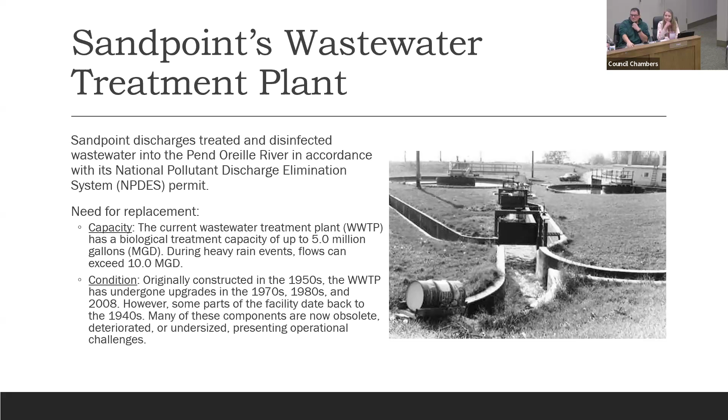So understanding our need and where we want to get to, we do have a few goals. There are several goals outlined. I'll highlight the first four that were prioritized by Mayor Grimm.

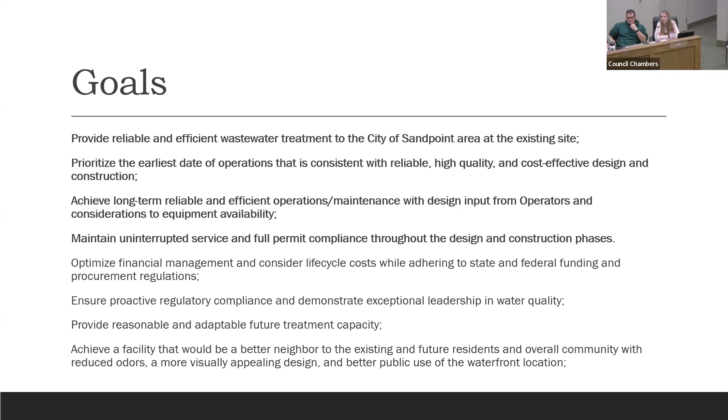Our goals are to provide reliable, efficient wastewater treatment to the city of Sandpoint and area at the existing site. Prioritize the earliest date of operations consistent with reliable, high quality, cost-effective design and construction. Achieve long-term, reliable, efficient operations and maintenance with design input from operators considering equipment availability, and maintain uninterrupted service and full permit compliance through the design and construction phases.

So understanding our need for improvements, replacing the plant, and our goals, this is the general process that we follow. It starts with a facility plan. Sandpoint adopted its facility plan in 2019. We're on the next step, which is our preliminary engineering report.

These are two reports that the Idaho Department of Environmental Quality, IDEQ, reviews and approves. That's the effort we're working on today, and this is all per IDAPA requirements. Our next step will be to develop construction documents, turn those into a permitting effort, and then go out to bid or construction, depending on our contracting method: design-bid-build or CMGC. That's how we turn this facility plan into a project, and that facility plan is really our guiding document for how we're moving through this process.

Below, you'll notice funding efforts. That is a parallel effort to the actual design and construction project, and it's ongoing. It's an effort that started in 2022 when Sandpoint updated their wastewater sewer rates, and it's an effort that will continue through the entire process.

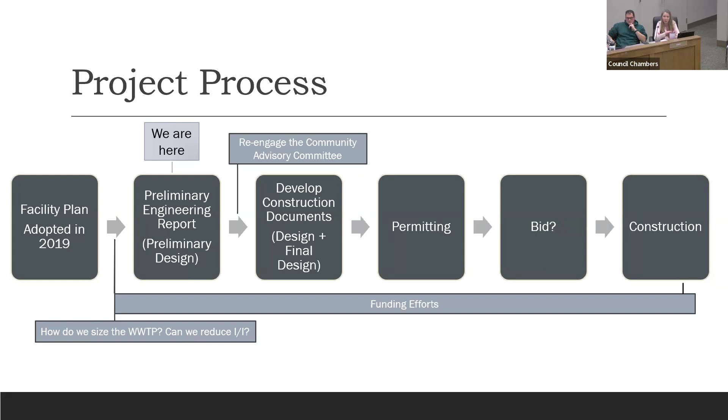So the scope of work that Keller is working on, and we have an update from them today, is the preliminary engineering report. You can think of this as the preliminary design, all in accordance with IDAPA standards. They'll provide preliminary cost estimates, select treatment types, and recommend contracting and construction phasing for how to actually implement the project. They'll also support funding efforts.

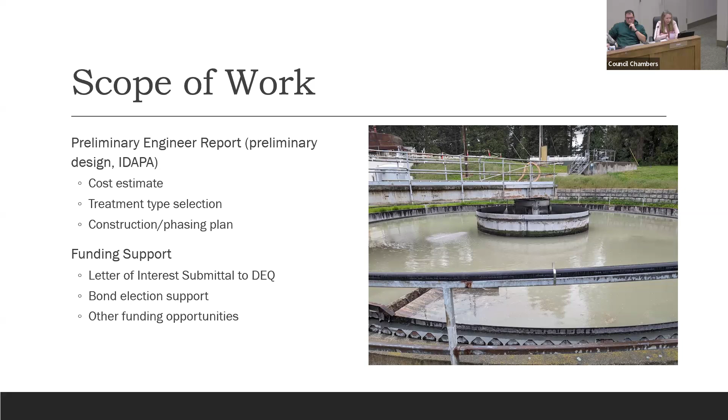We'll be submitting a letter of interest to IDEQ. They'll support us through bond elections and other funding opportunities. So with that, I will hand it over to Keller to provide an update.

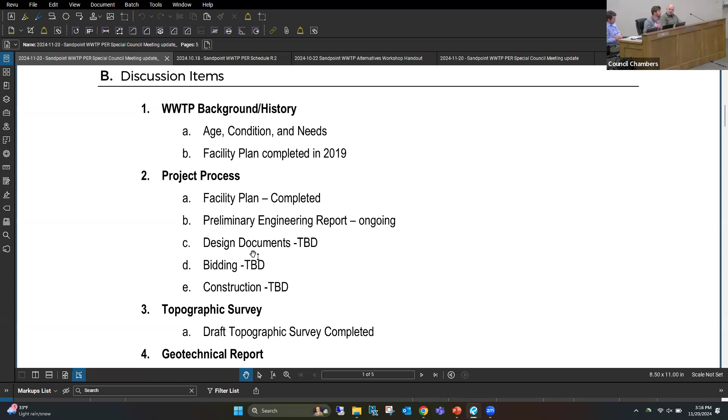On top of that, we've also completed a draft geotechnical investigation. We've gone out on site and done boreholes to understand the soil conditions.

This is really important because we all know Sandpoint struggles with soils and water, and high groundwater level. It's really important to capture that early on in this design phase to make sure that we're reflecting the cost to deal with that material on site and the construction challenges associated with that.

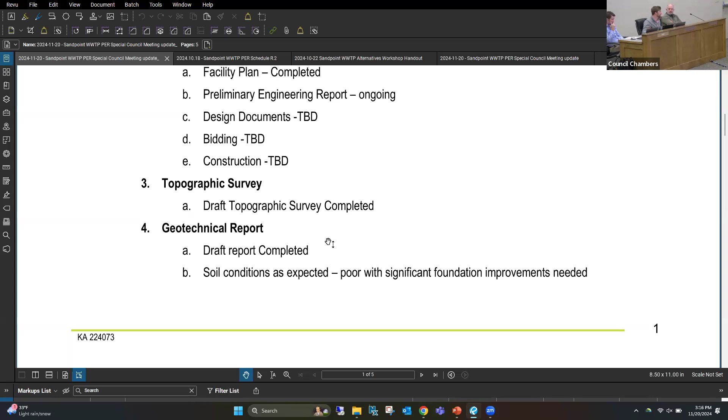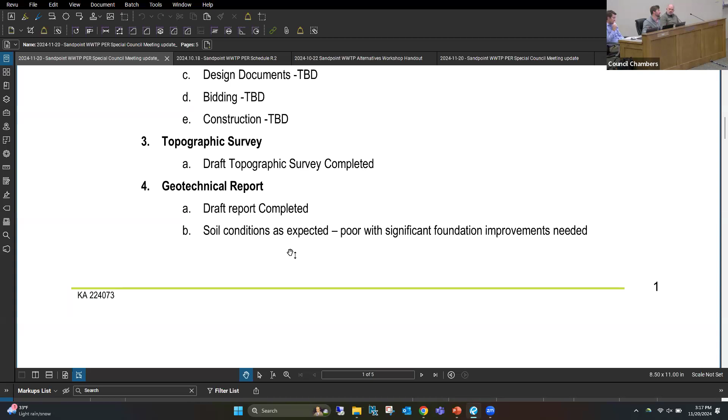So, as we expected, soil conditions were poor. There's going to need to be substantial structural design and foundation design to make sure that we don't have settlement issues. One of the things noted in our condition assessment is it's very evident in a lot of the facilities that there is settlement, whether it's buildings, concrete slabs, and whatnot throughout the site. That's a very common theme, and that has a lot to do with, one, the age of the facility, and two, the high groundwater level, and the overall soil condition.

So one of the things we helped go through and evaluate was, just to back up a little bit, a facility plan that was completed, that's at like a 50,000 foot level. You go through and take a high level view of where these projects and improvements are going to develop and how they're going to shape in. And then we take that and further refine it into a more detailed design that can be used to jump into your final design and development of the plans and whatnot.

So with that, one of the things we looked at is, how has the condition of these facilities changed since the facility plan? And at the same time, what do our electrical, structural, and process engineers see? I think Dallin can chime in a little bit on that.

But I think generally speaking, Holly and Devin have nailed it. You have a facility where many of the buildings and structures are beyond 60 years. There is some hope because some of the concrete in these structures is in generally decent shape given the age. But I think the big thing is that your facilities are approaching that expected useful life, and there needs to be a plan in place to make sure those are appropriately accounted for replacement.

Yeah, the only thing I'd add to that is that condition assessment is only as good as what you can see and walk around on the site. So the conditions of the interiors of basins that were not drained, we were not able to identify. The conditions of buried piping or other types of things like that are somewhat unknown.

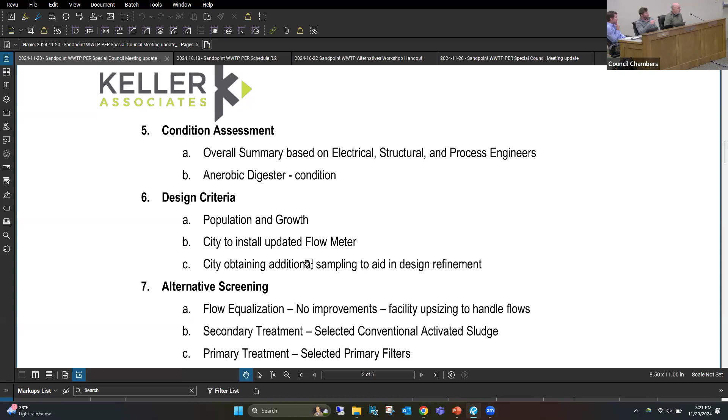So one of the first big lifts we had is we understood the existing conditions. We understood the site conditions. We understood how facilities were functioning. We refined, okay, what are we planning for? What's the population? What's the flows? And once we defined all that, then we went back and evaluated what are some other alternatives that should be looked at or considered that maybe weren't done in the facility plan that could provide value to the city.

And one of them, we have 4 items there, and one of the big ones was flow equalization. As we're all aware, we have a high I&I flow that comes in due to our snow and rain events, and that water makes its way into the sewer system, and then it overwhelms the treatment plant, and it becomes very difficult when you don't have a facility that can properly handle that and treat it.

So one of the alternatives we looked at is doing an equalization basin that could route, when you have those couple times a year peak flow events, into an equalization basin to alleviate your downstream treatment processes. We've done this in other communities throughout the state, like the city of Preston, and it was super beneficial from the aspect of not over-designing your downstream treatment facilities and enabling that peak flow to be reduced. Am I making sense?

Okay, so then we looked at, okay, if we didn't do that option, we were just going to upsize the facilities and disregard that. Unfortunately, we were all hoping that the flow equalization would pencil out, but by the time you actually size the equalization basin for how much of an I&I swing you have, it is a substantial facility, and it did not pencil out to actually build this facility for these couple days out of the year that we're looking at. So that was a scenario where we weighed those odds and evaluated each one of these alternatives based on a criteria.

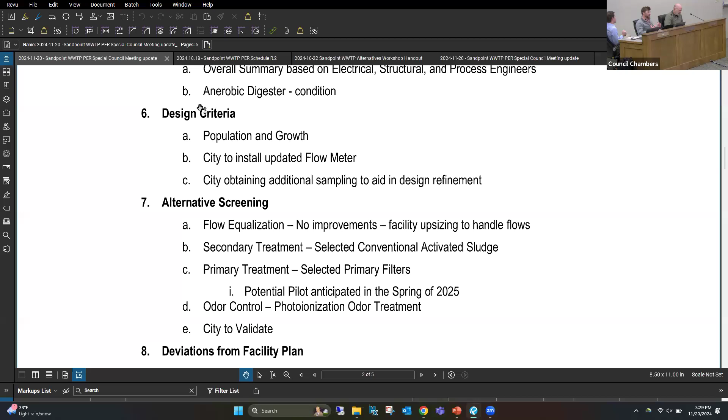What was ultimately selected was photoionization, which gives a lot of flexibility for odor treatment and removal. It requires less maintenance, and it's just a good staple for removing odors.

There wasn't a ton of discussion about this in the facility plan, so I think it was a good topic to dive into early on.

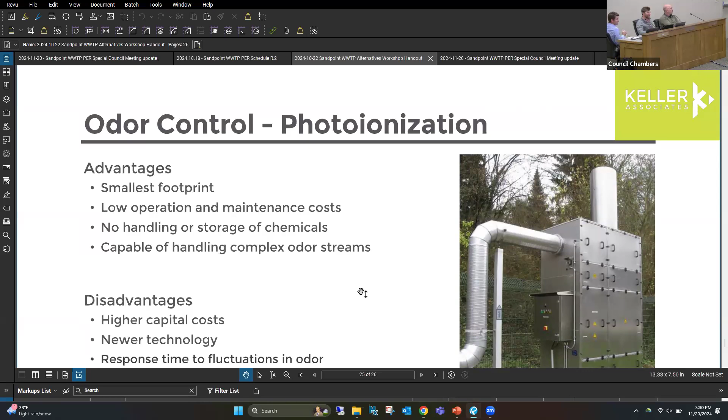Just jumping through the slides here—it has a fairly small footprint. The operations and maintenance component was a big consideration, since we don't want to add more work to Devin's workload already. There's less management and maintenance involved with it.

It does have a slightly higher cost than some of the other odor technologies, but I think that makes up over the long term from not having to maintain and operate it as much. One important thing to note is we're doing some odor testing with this project to fully understand the odors being experienced, whether it's H2S or otherwise, making sure whatever is designed handles those odors properly.

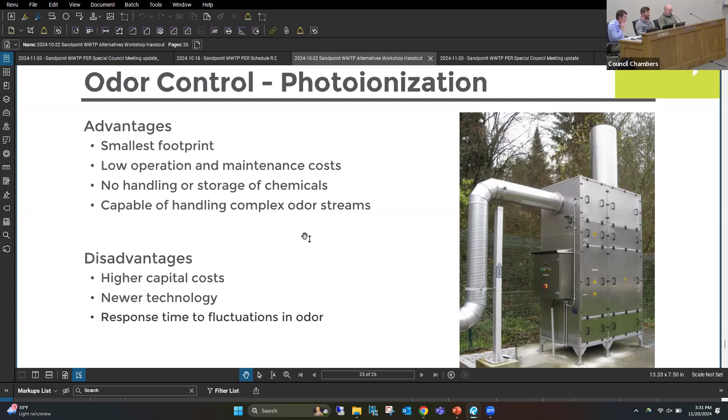We've all driven by some of the treatment plants around here that have odor control, but you wonder if they actually have odor control. So that'll be a really important component in this regard.

Then there are deviations from the facility plan, which Holly alluded to. The intent here is that the city selected improvements from the facility plan, and now a consultant came in and said, let's look at this from a blank slate—what do we like, what makes the most sense, how does this correspond to the city's goals, are we achieving that or not. There are probably too many items in the agenda to go through today.

But it gives you a summary of every kind of process element in the treatment plant. We're not going to go through every one of these, but it notes what was planned for in the facility plan. And then the far right column is Keller's take on our evaluation of these improvements and what's needed or different from that. So do you want to jump to any of these that would be good to hit on specifically?

Yeah, I think we'll just highlight maybe three of these here if we can. A large majority of the facility plan, we still recommend following through with.

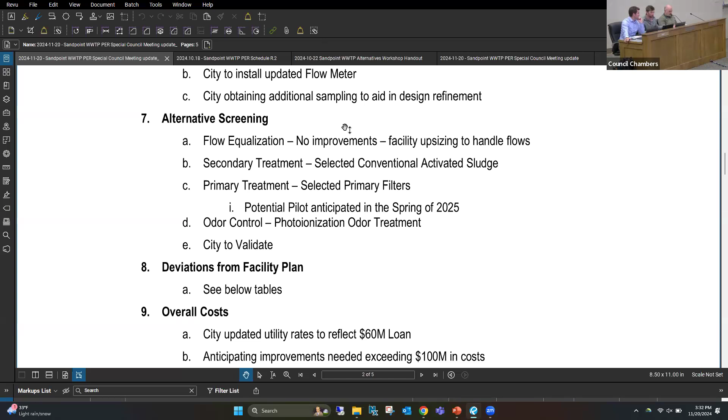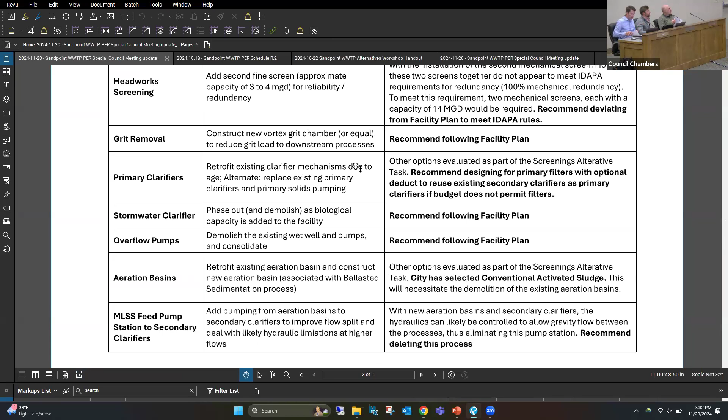As we alluded to earlier, that secondary treatment technology has a couple of components tied to it. If you look through that, aeration basins, MLSS feed pump station to secondary clarifiers, the secondary clarifiers, RAS pumping and WAS pumping, and the ballasted sedimentation system, that's all lumped into that secondary treatment process. As we talked about those alternatives and looked at the various secondary treatment processes, the city selected to go with the conventional activated sludge system, so all of those things lumped together pivot to that technology. That is a deviation from what the facility plan recommended with the ballasted sedimentation process. So we wanted to identify that as a detour from the facility plan.

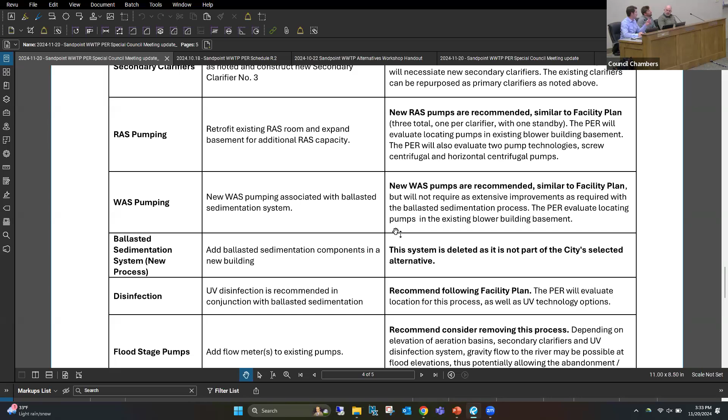The other two that we wanted to identify with the city that were not identified in the facility plan: one is the headworks facility. This is the front lines of the wastewater treatment, where rags, debris, and those types of things are removed from the process so that any downstream processes, pumps and pipes don't get clogged and create a headache for Devon.

The facility plan did not identify having sufficient capacity for the design flows expected in the planning period. Or rather, it didn't provide enough redundancy in the system so that if you lost a screen, or if a screen was offline for maintenance, there would still be sufficient capacity to treat the peak flows coming into the plant. Our recommendation is to ensure reliability in that process by providing enough screening that you have redundancy, with another unit or units that can provide capacity for all the flow. That is in line with the requirements of IDAPA to have that redundancy.

The other process we identified as needing improvements beyond what was identified in the facility plan is the digestion process. Without getting too technical, the digestion process basically takes the solids that have been separated from your liquid stream and digests those solids so that the end product is free of vectors or pathogens. It's safer to apply on land-applied crops, or in some cities it can produce a biosolid used as compost or fertilizer in your garden, though not in Sandpoint's case. Generally, the idea with digestion is you're producing a safer biosolid than would otherwise be produced.

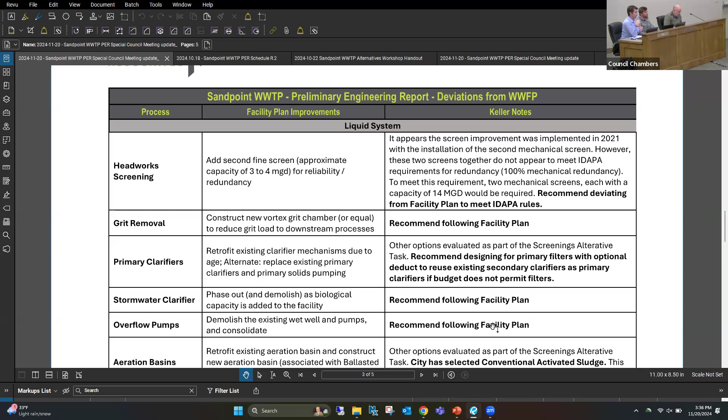To achieve that biosolid, you need a certain number of days in the digestion process. The digestion process at the plant right now is very close to capacity. As flows continue to increase with additional population, that digestion process does not have sufficient volume to contain those solids to meet the Class B biosolid level needed for the city to dispose of them the way they're disposing of them now, which is land application. The facility plan did not identify any improvements to increase that volume or capacity in order to continue meeting a Class B biosolid. Our recommendation is that sufficient capacity is provided to meet that.

Sorry, that was very technical, I apologize. I can sometimes get carried away. No, exciting—for me, it is.

Holly, do you think we captured those critical ones? Devin, was there anything else you think would be good to discuss on those deviations? I think you captured it pretty well.

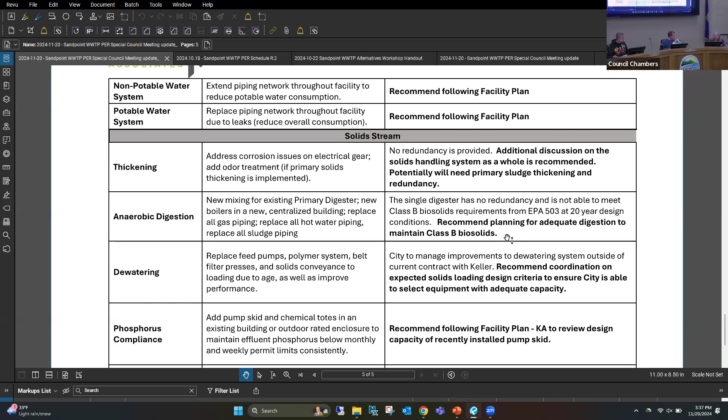Yeah, I'll just add, I was at all these meetings working with everyone on these discussions. On the primary treatment side, one of the really challenging things was that this membrane bioreactor is a really neat technology. Do you all have this version? No. Can you just flip to the layout on the bio membrane plant, the MBR plant? Yeah, I think it's page 13.

So this one was one of the four technologies we looked at as an alternative, and it's really amazing. Basically, the whole sewer plant is contained in that purple building.

When we were looking at this, obviously once we start digging into the site and building, there's a lot of pipes and unknowns from all the patchwork and other things.

So in many regards, having a compact footprint—basically a fully enclosed system on a small portion of the site—meant limited exposure to unknowns, risk, and contingencies.

But the problem with this technology is that you can't just get funding for a piece of it. This thing turns on, and it's on, and it replaces everything else. So it doesn't give us that flexibility. And this is another thing we discovered working with DEQ and rural development.

The way DEQ is going to take our letter of intent, they're going to put our needs in a list across the state. They've got a pot of money and they need to figure out who they're going to fund, and they obviously don't have enough money any given year to fund everyone. So depending on the needs from other communities, if our ask for something like this is significant, they might say...

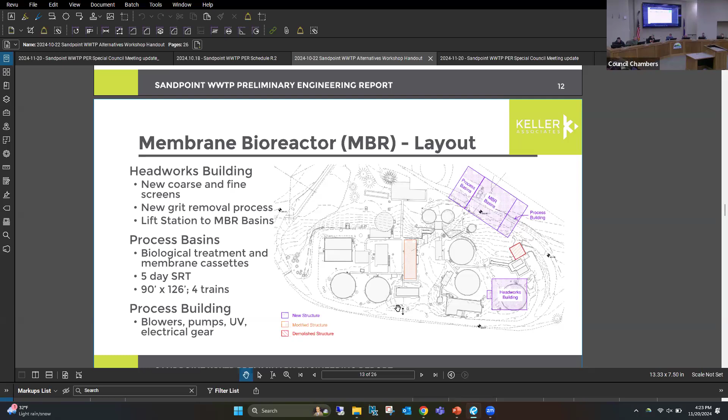Could you go to page 6 on your PowerPoint, just so that—and maybe page 7 too—so they can see.

Mr. Mayor, if I might make a comment. If I had just a minute to process what you just said, I'd rather sit through a 2-hour PowerPoint. This is a $100 million decision the council is going to have to make, so I'll just say it out loud. I've suffered up here through many hours of presentations, but this one, although the topic might not be exciting to everyone, is a super important decision we have to make. So I'd rather have too much data and sit here longer than not have enough and be questioned for the decisions I made.

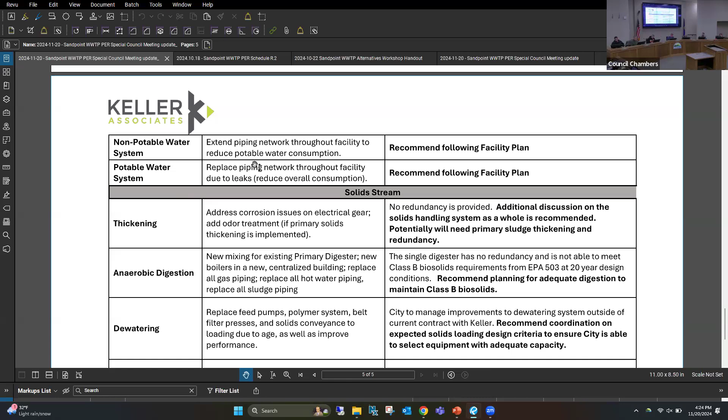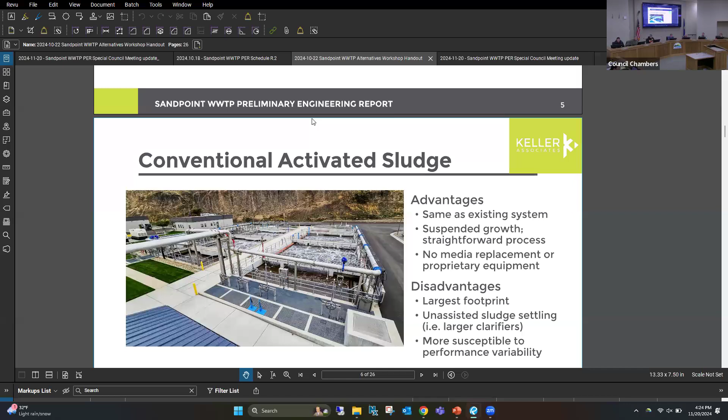So that's your... I'm not sure if those are aerators or secondary, but this is Lewiston's wastewater treatment plant, by the way. Lewiston, Idaho. It looks a little different than ours. They don't have odor activation. No, I'm just kidding. That's a different industry that's producing that. Whatever odors they have easily get masked over. Yeah, no need for it there, huh?

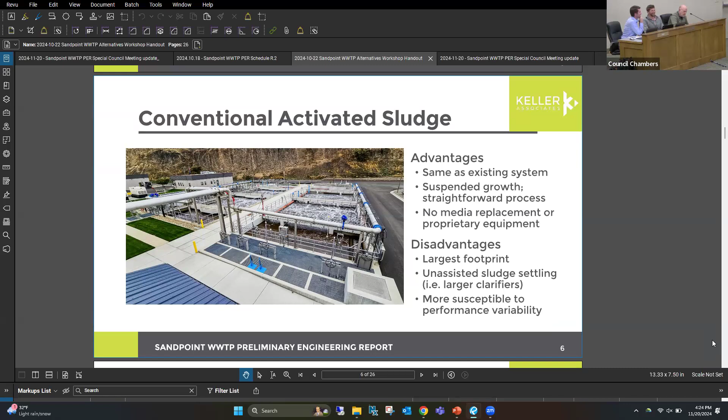Mr. Mayor, is it going to be the same footprint that we've got out there now, the same area, or is it going to expand? Yeah, we talked about keeping it within the fence line. At one point we did explore going over towards the basketball courts, and with this attenuation tank, maybe covering it with a pickleball court, but we came back and decided not to encroach on the arboretum, keeping it within the fence.